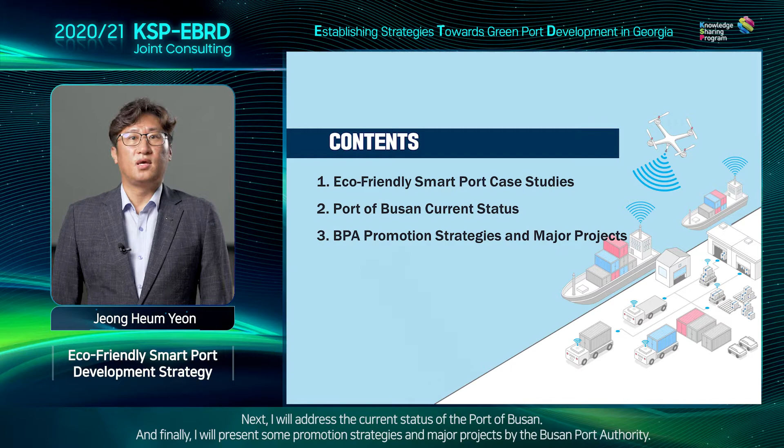The first is automation technology in the field of port operations, and the second is digitalization based on information. When these two technologies are effectively combined, the functions of a true smart port can be achieved. In today's presentation, I will begin with an explanation on case studies of eco-friendly smart ports. Next, I will address the current status of the Port of Busan. And finally, I will present some promotion strategies and major projects by the Busan Port Authority.

We will first look into the eco-friendly smart port cases. With the development of the Fourth Industrial Revolution technology, port automation and autonomous driving is rapidly progressing in the shipping and port sectors. First, Singapore, which is known as the world's #1 advanced port, is building the world's largest smart port through the construction of the Tuas new port. In the case of China, Shanghai Port, in order to verify the technological prowess of a state-owned company in the field of port equipment called ZPMC, and to dominate the global market, it is preemptively introducing automation and autonomous transportation equipment and vehicles to the port.

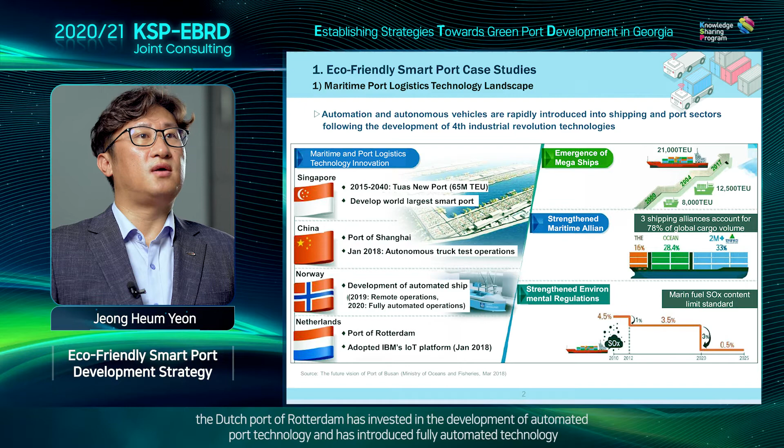The Dutch port of Rotterdam has invested in the development of automated port technology and has introduced fully automated technology with the newly constructed Maasvlakte 2 port and is currently striving to complete the smart port by developing an IoT platform and digital twin technology, which are the core of digitalization. Due to vessel enlargement, the key goals for creating smart ports in each country are to improve port productivity and efficiency, and to effectively respond to port operations in accordance with the strengthening of the Maritime Alliance, as well as to respond to strengthening environmental regulations such as reducing SOx and NOx.

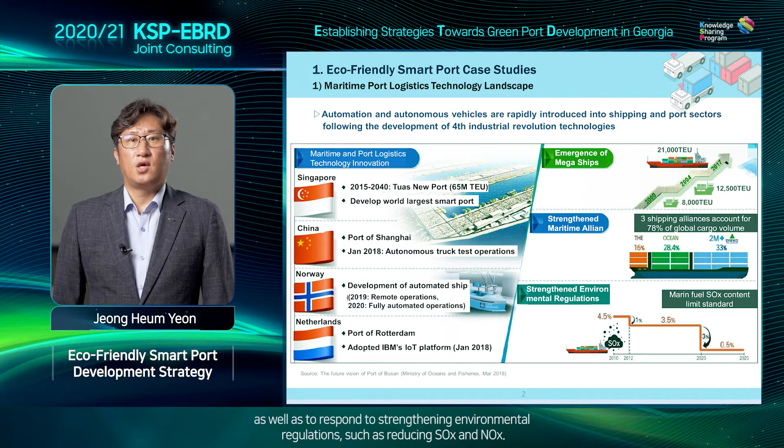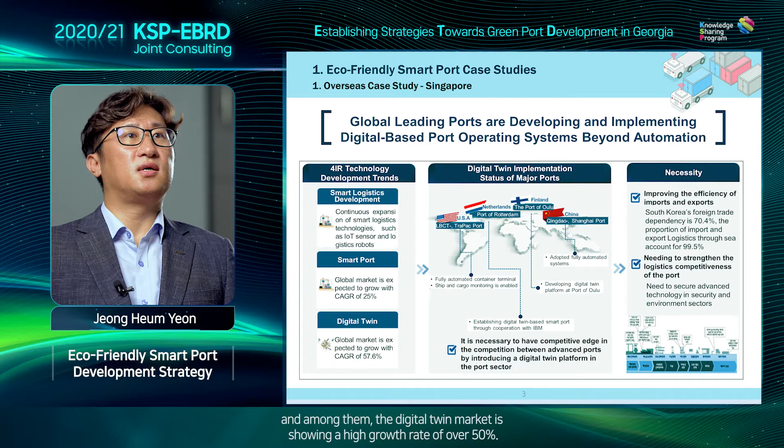Currently, the world's most advanced ports have built and are operating digital-based port operation systems beyond that of only automation. Due to the Fourth Industrial Revolution technology development, smart logistics technologies, such as IoT sensors and logistics robots, are continuously being applied, and the smart port market is also growing at an average annual rate of about 25%. And among them, the digital twin market is showing a high growth rate of over 50%.

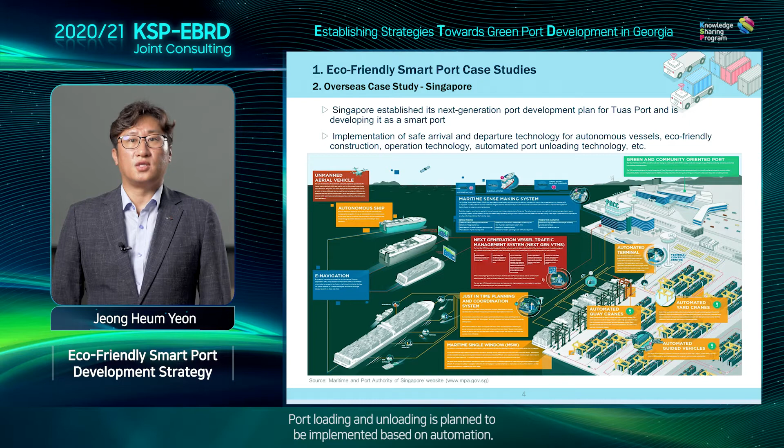Singapore Port is presented first among the overseas case studies. A plan to develop the next generation port by reclaiming the Tuas area on the outskirts of Singapore is currently underway. With a total of 65 berths, it plans to optimize vessel operations and prepare for the emergence of autonomous vessels through e-navigation technology to support safe vessel entry and departure. Port loading and unloading is planned to be implemented based on automation.

Tuas Port is introducing eco-friendly technologies, not only in port operations, but also in the construction of the port. During the construction process, changes in marine ecosystems are monitored every 6 months, and in the event of issues such as pollution or ecosystem disturbance, construction is halted until these issues are resolved. Tuas Port plans to achieve zero emissions by using green electricity-based energy, rather than fossil fuels that cause air pollution.

A single window-based licensing system called Digital Port Platform was developed for the efficiency of port operations, which is used for the unification of administration activities such as vessel entry, exit permit, port facility use permit, animal and plant quarantine, and crew entry-exit. The pilot CALISTA program has been developed to enable global cargo tracking and transportation contracts for trade companies.

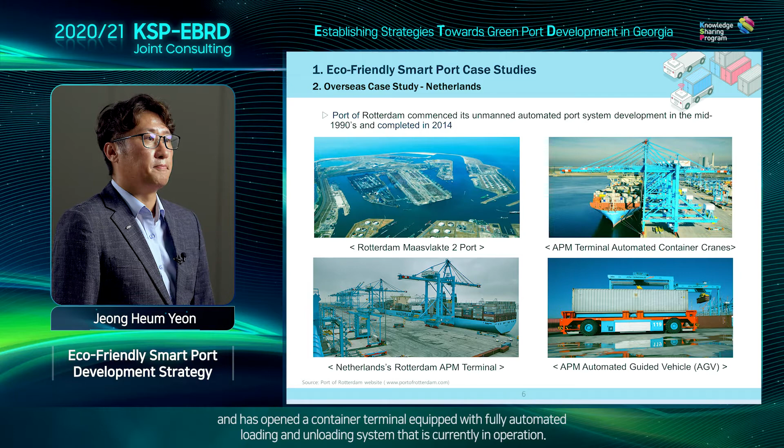The second case study is the Port of Rotterdam in the Netherlands. Since the mid-90s, it has invested in the development of automated port system technology, which was finally completed in 2014 after about 20 years. As in the case of Singapore, the Port of Rotterdam reclaimed the Maasvlakte 2 area to develop a new port area and has opened a container terminal equipped with a fully automated loading and unloading system that is currently in operation.

The Port of Rotterdam has developed and is currently piloting the Pronto system, a monitoring platform based on IoT sensors and ship AIS, following the automated port system. The Pronto system supports the safety of ships using the port and is equipped with functions to support optimal routes and optimal fuel consumption. In addition, the Port of Rotterdam is developing a digital twin system for the safety of workers in the port and plans to operate a system that can monitor and control all port facilities, equipment, and workers in the port in real time.

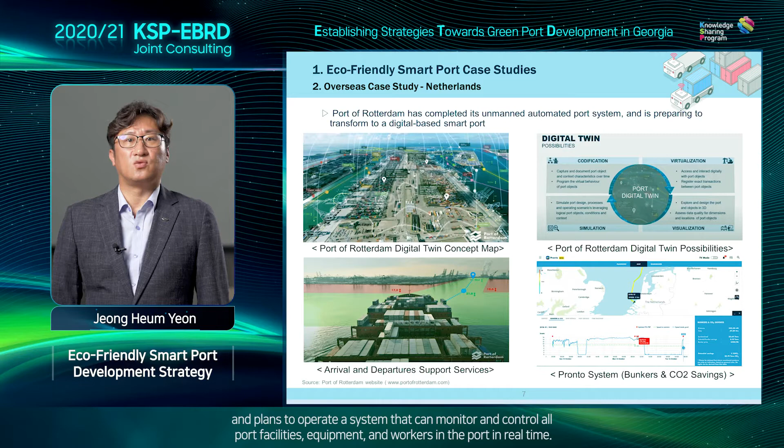The next case study is the Port of Hamburg in Germany. Unlike the previous ports, it is developing and operating a smart road system that supports the optimal route and accurate arrival time of cargo vehicles entering and exiting the port while promoting automation. The system employed at the port here minimizes congestion in the port caused by the failure of freight vehicles to arrive on time due to changes in traffic conditions in the city.

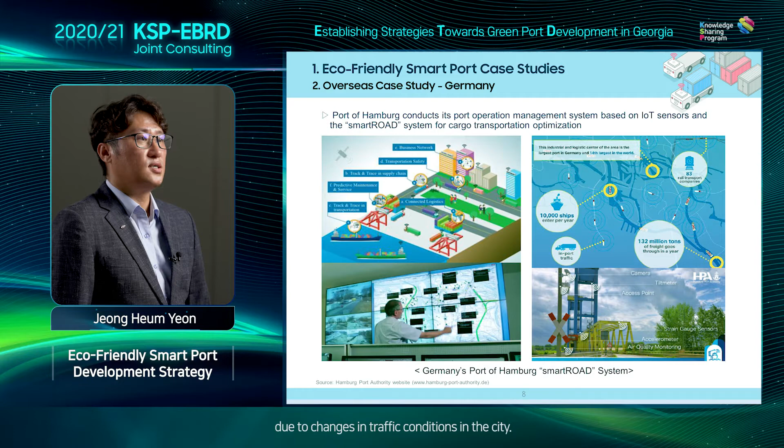Now we will discuss the current status of the Port of Busan. First, due to the lack of information exchanged among logistics-related entities such as ships, terminals, and transportation companies, social problems that include various safety accidents, traffic and logistics congestion, and environmental pollution continue to occur. In particular, due to the influence of mechanization and automation, a number of safety accidents occur due to friction between working personnel, equipment, and workspace. So it is necessary to develop preventative technologies.

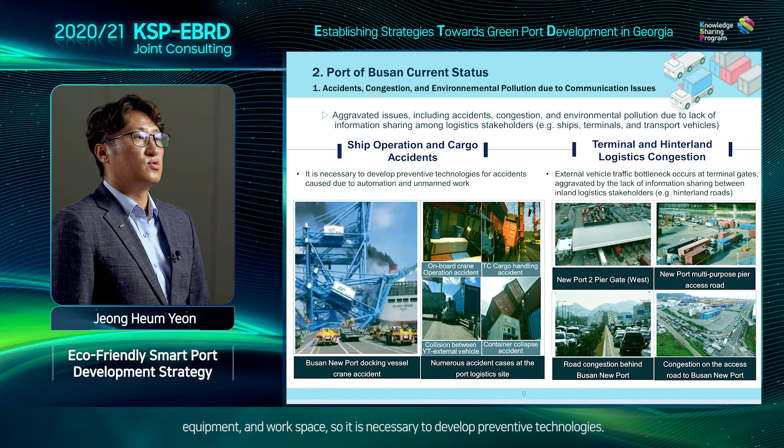Second, we are operating manned control-based quay wall equipment, semi-automated yard equipment, and transport equipment such as yard tractor, YT, reach stacker, RS, and top handler, TH, which are difficult to automate. In particular, as mentioned above, most terminals have a horizontal structure rather than a vertical terminal structure, which is essential for unmanned automation, so there are many difficulties in unmanned automation. Only 1 out of 7 container terminals is vertical.

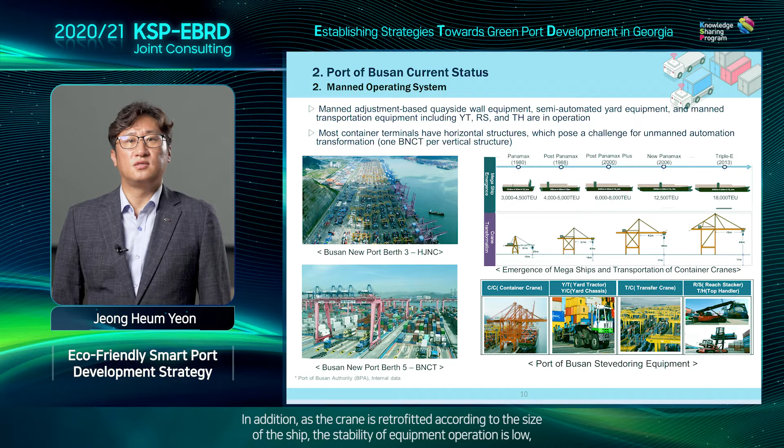In addition, as the crane is retrofitted according to the size of the ship, the stability of equipment operation is low, and there are many difficult situations when switching to automation. Third, there is a limited amount of manufacturing and maintenance technology for cranes, which are the core of automation. Among the 116 container cranes in the Port of Busan, 42 were domestically manufactured, accounting for 36% of the total. Most of the cranes in Busan New Port in particular, which opened in 2006, are equipped with foreign technologies.

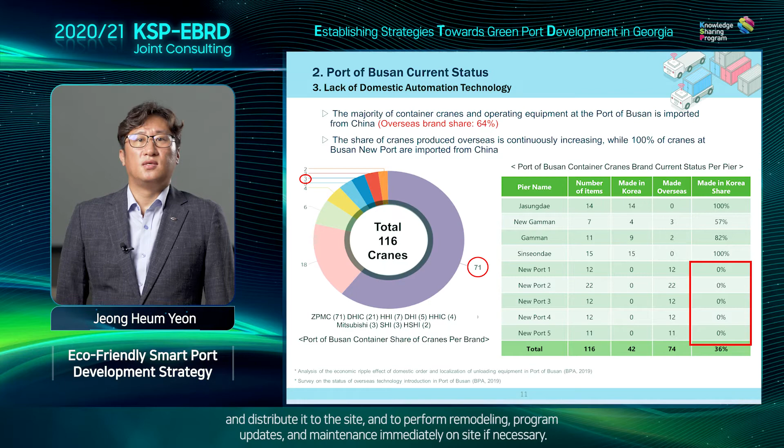It should be possible to directly develop automation technology tailored to the operating environments and characteristics of the port and distribute it to the site, and to perform remodeling, program updates, and maintenance immediately on site if necessary. The fourth problem is lack of source technology for essential parts. A lot of foreign technologies and products are introduced not only for cranes, but also for other core parts. The time and cost required for procurement of a product is high when crane accidents occur, making it difficult to supply and replace parts in a timely manner.

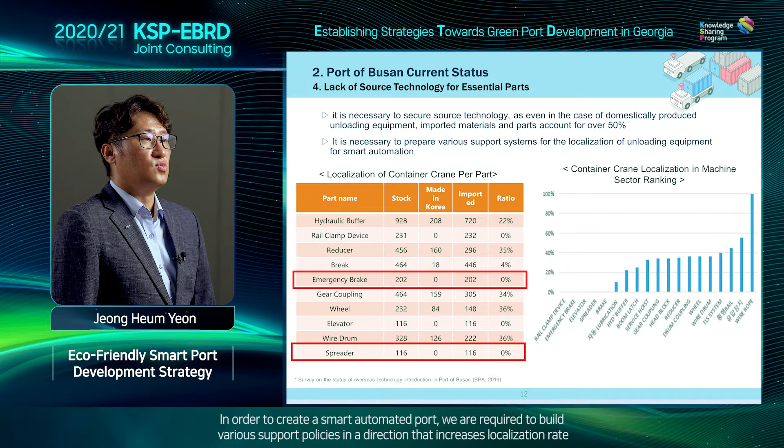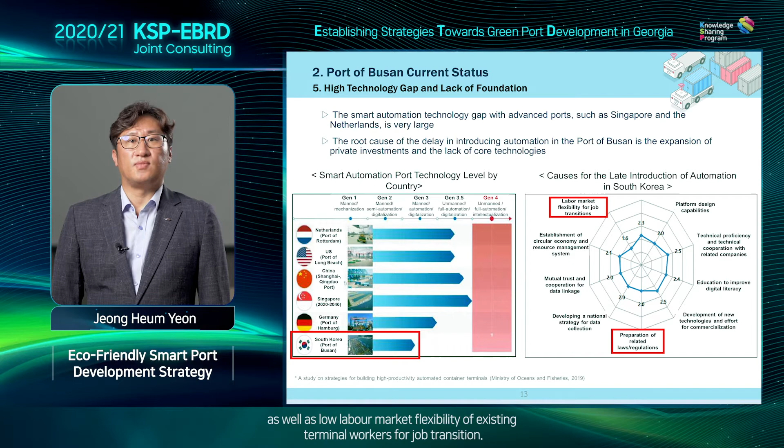In order to create a smart automated port, we are required to build various support policies in a direction that increases localization rates for key parts, along with localization of cargo handling equipment. The fifth problem is the high technological gap with advanced ports. The Port of Rotterdam currently operates an automated port, and the technological gap between the Port of Rotterdam and the Port of Busan is large due to the lack of awareness and related legal systems, as well as low labor market flexibility of existing terminal workers for job transition.

The last problem is the lack of interest in policy support for the development of new technologies for smart logistics, not only at the ports, but also at the logistics centers located in the port hinterland. Amazon's anticipatory shipping is a good example, which collects customer purchase data with IoT technology, analyzes it using big data and AI, determines the expected purchase item and time, and secures inventory in advance and manages the logistics center in a way that allows immediate delivery upon purchase and payment. However, there is currently no Smart Logistics Center function in the Port of Busan, and due to the nature of shipping in port logistics, it is only concentrating on mass transportation and storage.

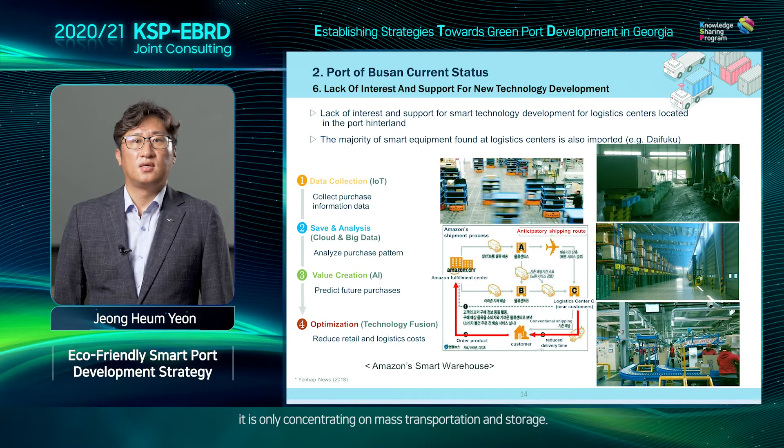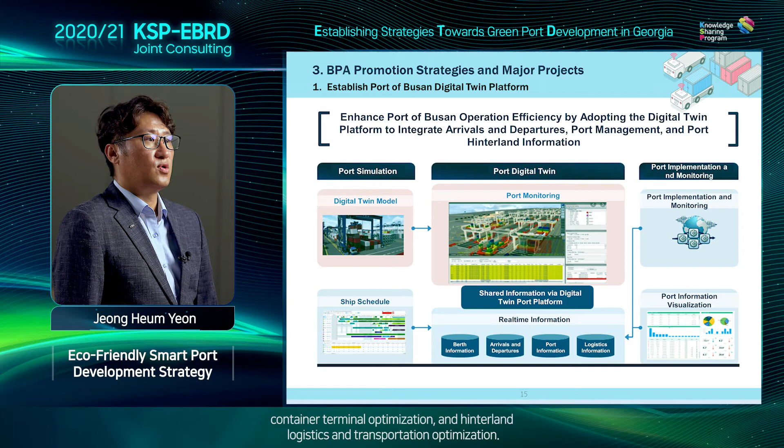I will now explain the promotion strategies and projects in the Port of Busan. We will focus on various projects to solve the problems that were mentioned earlier. The first project is to build a digital twin platform for the Port of Busan. We are currently carrying out the first phase of the pilot test with government support, and the establishment of the test platform will be completed by the end of this year. The productivity of container terminals was the focus in the past, as shown in the figure. The digital twin platform of the Port of Busan is encompassing 3 phases: ship and cargo entry and exit optimization, container terminal optimization, and hinterland logistics and transportation optimization.

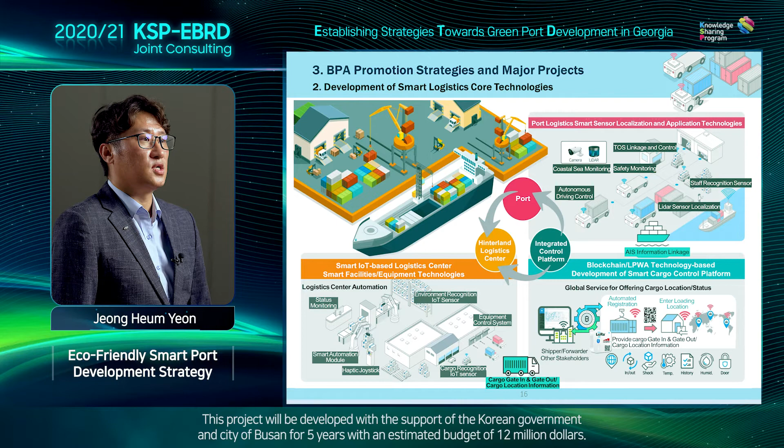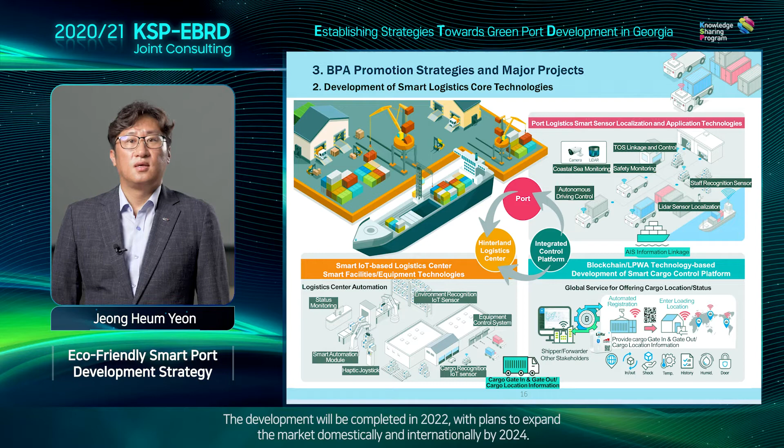Second, the development of automation modules and technology for forklifts used in logistics centers. Third, the development of a tracking and control system. This project will be developed with the support of the Korean government and the city of Busan for 5 years, with an estimated budget of $12 million. The development will be completed in 2022, with plans to expand the market domestically and internationally by 2024.

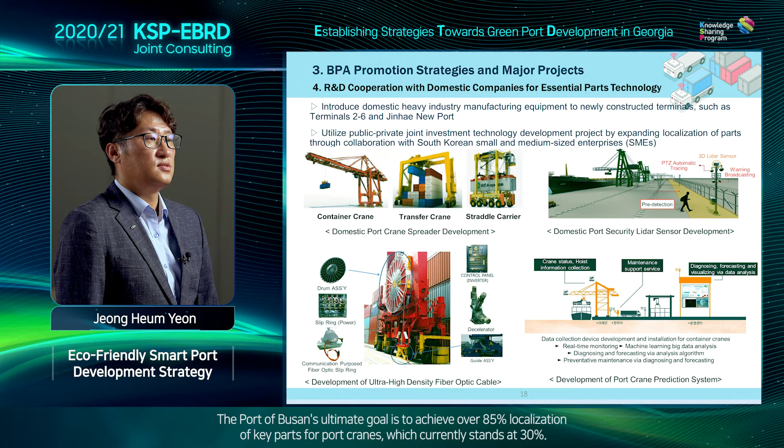We are developing the technology for key parts of port handling equipment. The program conducts a full investigation of all cranes in the Port of Busan, identifies the core parts into 2 groups, which are mechanical and electrical parts, and converts the parts that depend on foreign technology to domestic technology. Currently, we are developing 3 core technologies: spreader, cable reel, and crane predictive diagnosis system. This year, we plan to develop inverter, emergency brake, and automated stop technology. The Port of Busan's ultimate goal is to achieve over 85% localization of key parts for port cranes, which currently stands at 30%.

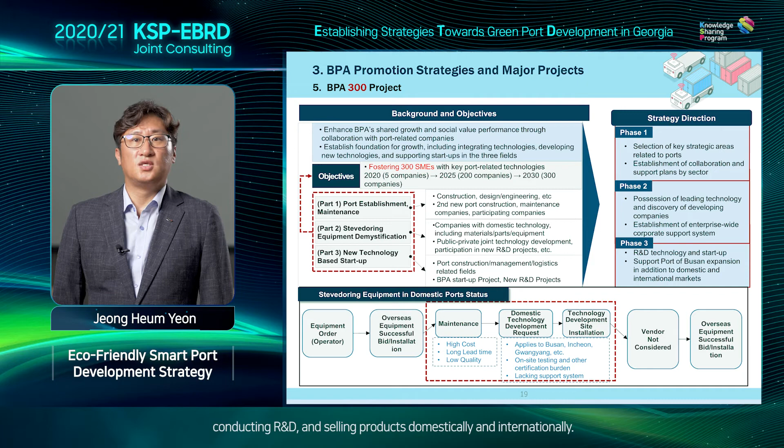We will now look into the BPA 300 project, which is a plan to foster 300 SMEs related to ports. As mentioned previously, we plan to invest in joint investment with 300 startups that will be in charge of developing core parts for port cranes and smart port technology, conducting R&D, and selling products domestically and internationally. We are currently building a startup center that will become a base for growth for 300 startups. The 4-story building is being built in the North Port redevelopment site behind Busan Station, and it is scheduled to open at the end of September this year. We plan to expand the development of new technologies in smart ports by fostering startups in the port sector.

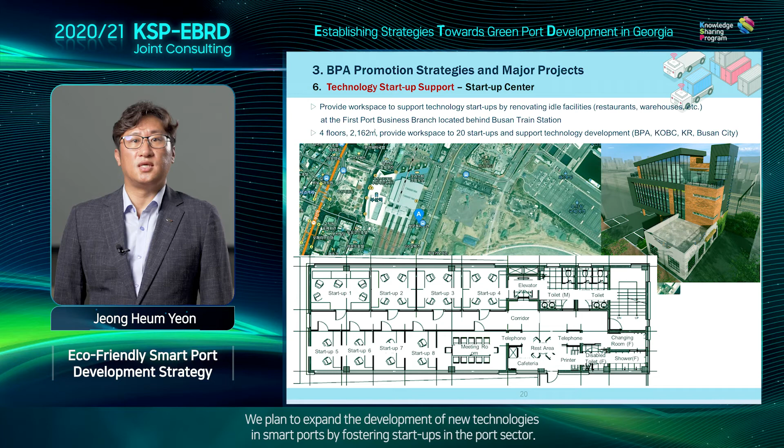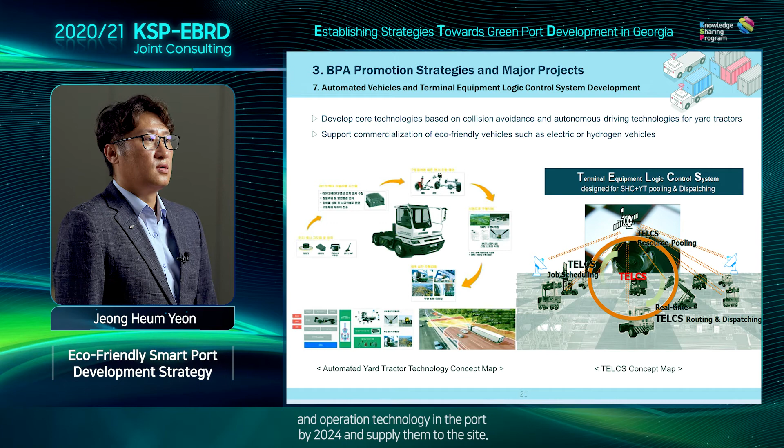In this slide here, we will take a look at the development of core technologies for autonomous driving transport equipment. We are developing a technology to convert yard tractors, which are mainly used in horizontal terminals, to autonomous vehicles. Currently, about 700 yard tractors are in operation in the Port of Busan, and we plan to complete the development of the core parts for autonomous cooperative driving and operation technology in the port by 2024 and supply them to the site.

We are developing remote control technology for port cranes using 5G technology. Mobile edge computing technology is being linked with 5G technology, and development is expected to be completed next year. This technology will secure transfers of large amounts of data faster and more accurately. Currently, it is applied to transfer cranes, which are yard equipment, but it is planned to be applied to container cranes and transport equipment in the second phase.

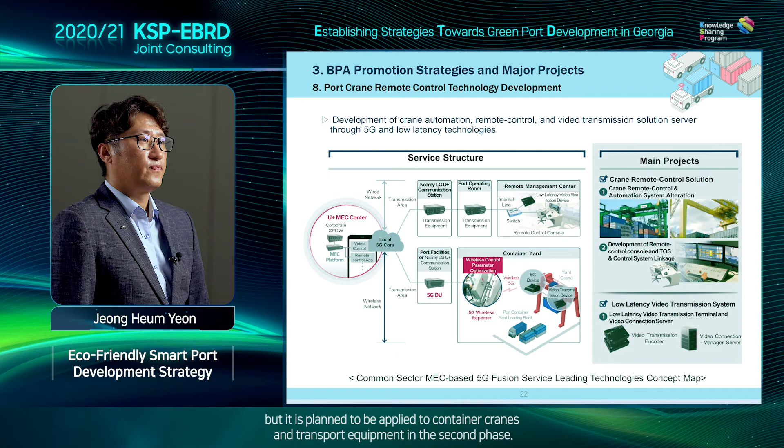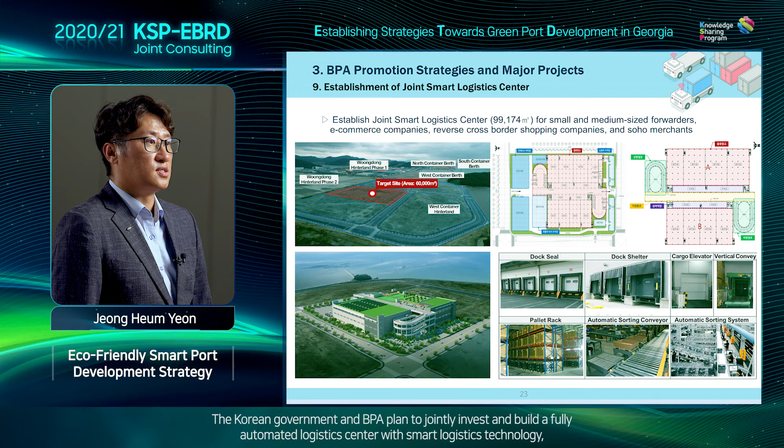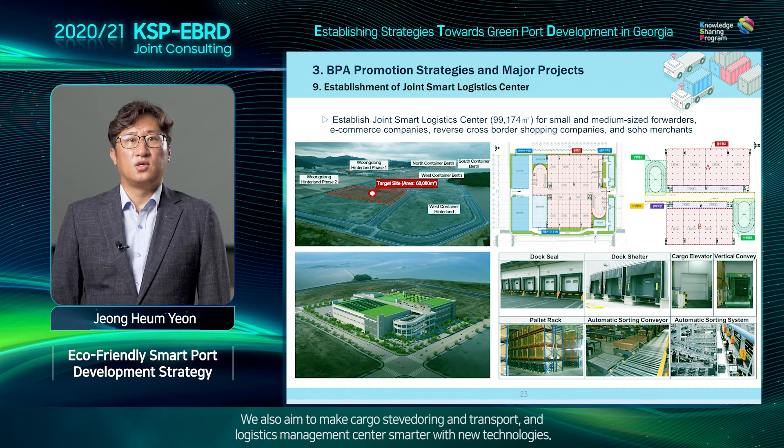We plan to establish a joint smart logistics center. The Korean government and BPA plan to jointly invest and build a fully automated logistics center with smart logistics technology, which differs from a conventional logistics center in the port hinterland. We also aim to make cargo stevedoring and transport and logistics management center smarter with new technologies.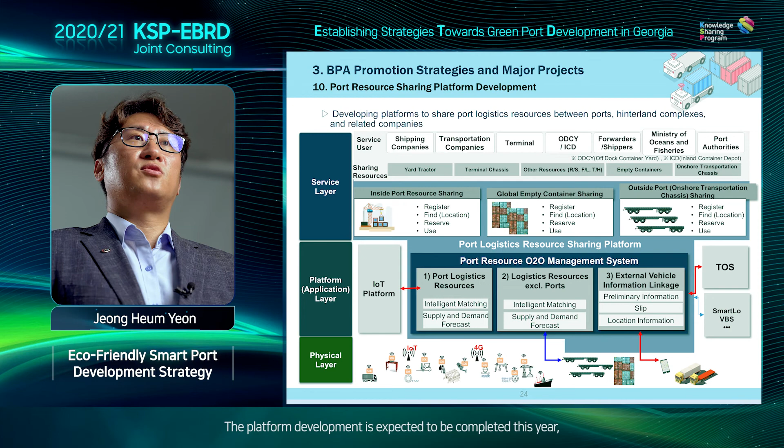Furthermore, we are developing a resource-sharing platform for the Port of Busan. In line with the concept of sharing economy, we are developing a system that enables sharing facilities and equipment in container terminals during their idle periods. The platform development is expected to be completed this year, and it is planned to expand not only to port facilities and equipment, but also to crane parts procurement and maintenance.

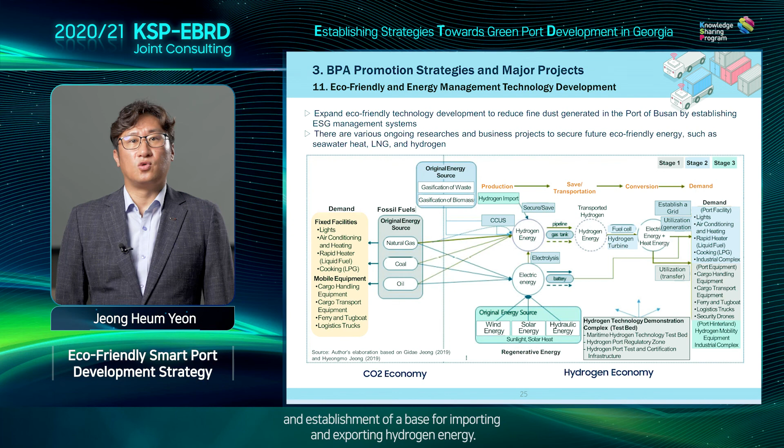Lastly, I will introduce the plan to create a green hydrogen port. In relation to BPA's ESG management system, we plan to develop and apply hydrogen-related technologies, which are eco-friendly, in order to reduce fine dust generated in the Port of Busan. We plan to promote the conversion of all transport equipment to hydrogen, energy independence through the installation of hydrogen power plants in the port, and establishment of a base for importing and exporting hydrogen energy.